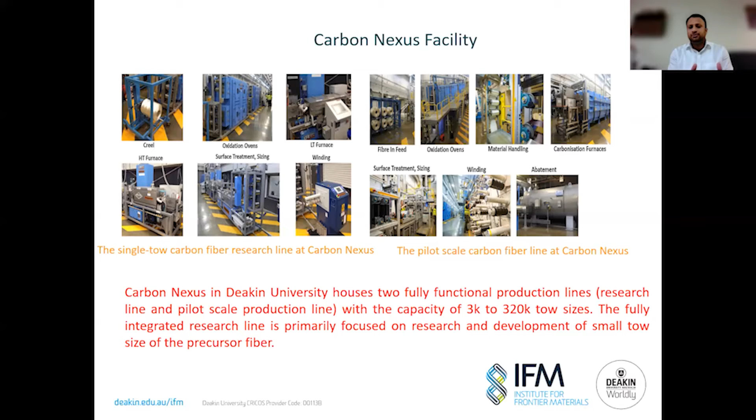And then if we really want to process less than 3K, we also have a facility called carbon fiber simulator. We normally use this carbon fiber simulator for feasibility studies. Let's say we are developing some new precursor; for running the research line and the pilot line, we require a lot of precursor fiber. But for just simulating the stabilization and carbonization parameters, we use the carbon fiber simulator, where we can use any tow size, from 300 filaments to 3,000 filaments. So these are some facilities in Carbon Nexus.

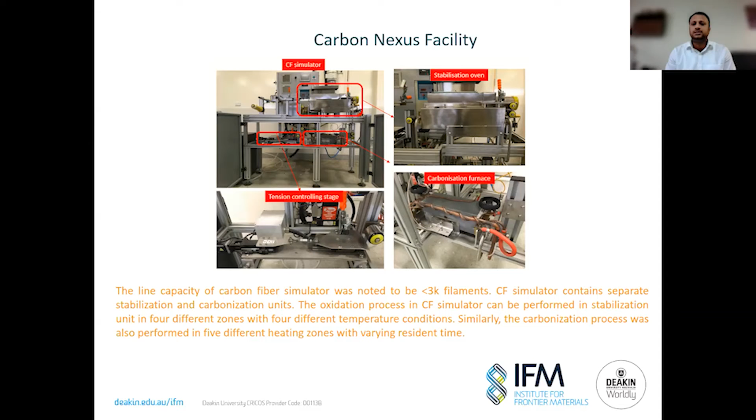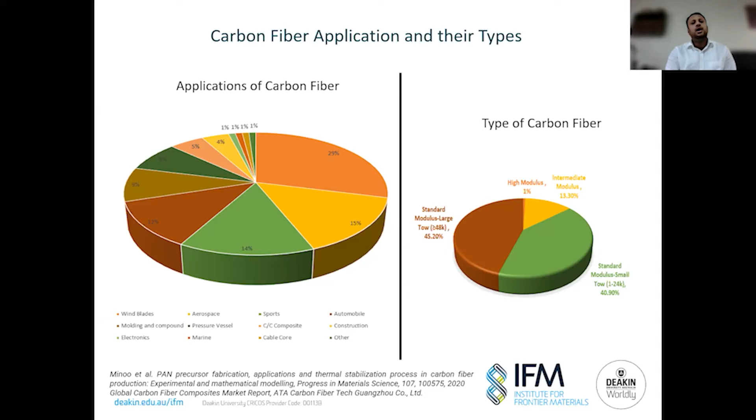There are different types of carbon fiber available: high strength fiber, high modulus fiber, and intermediate. I will not go into much detail on the basis of these definitions, but generally they are defined in four to five different forms. And if you look into carbon fiber manufacturing, three major precursor materials are available: polyacrylonitrile, pitch, and rayon. The entire process consists of first producing the precursor, then stabilizing it, carbonizing it, and finally comes the carbon fiber.

The overall carbon fiber market is fundamentally dominated by polyacrylonitrile. 90 to 95% of the carbon fiber market is covered by polyacrylonitrile. Pitch comes second. Rayon is almost not used at all nowadays because the final carbon content is very low. So if you talk about the challenges, why we really need to replace PAN or reduce the cost of carbon fiber manufacturing, the major challenge comes from the PAN precursor material cost.

For the overall cost distribution, we had one small project with Ford US where we did an in-depth cost analysis of the production. We developed our own model considering each and every aspect. Since we have the pilot line, we also validated this model. Based on our model, we identified that around 50 to 53% of cost comes from the PAN.

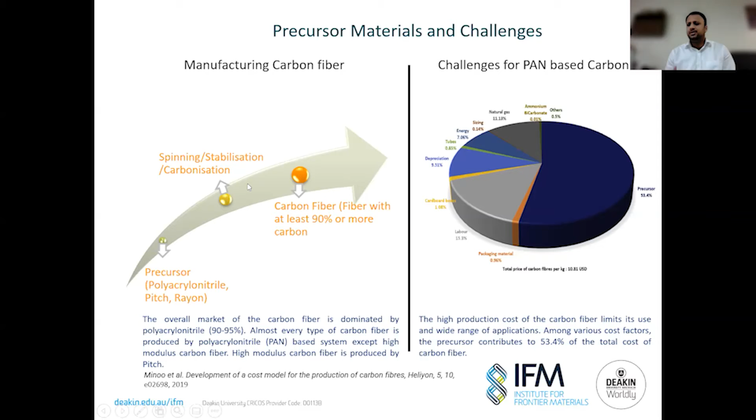Among a lot of options, lignin was considered one of the prominent materials from which we can develop a precursor. I will not go into what lignin is and how it is produced, but generally lignin is the second most abundant material after cellulose, and it exists with cellulose and hemicellulose, providing structural stability to the plant cell. This project was funded by Ford US for their automotive application. This year we finished this project, and we did this on a research line.

The catch in this project was, if you see any lignin papers or projects, they normally do it on a lab scale. We have done it on a pilot scale. We produced around 500 meters to 1 kilometer of continuous fiber out of lignin. And we have done the cost analysis also. We have shown that by using lignin, we can reduce the cost by 25%. We are further moving ahead, and we are pretty sure that we can further reduce the cost.

This project has finished this year. We are continuing for the next year, so we are looking for some better and more satisfying solution coming out of this project.

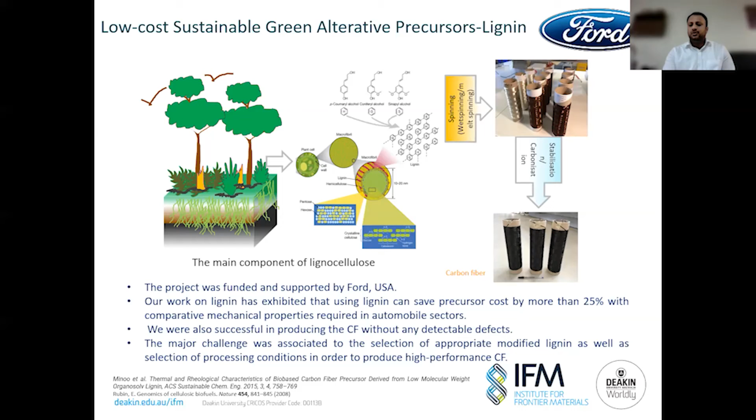And then we were looking for a second alternative for carbon fiber development, which is called asphaltene. Actually, this project was funded by Alberta Innovates. They are a petroleum-based company in Canada. We finished phase 1 last year, and this year we were granted the second phase, where phase 1 was the feasibility study. Basically, in phase 2 we are working on large quantity carbon fiber development from the asphaltene.

So what is asphaltene? Basically, in Canada, mostly oil comes in the form of a sand, which is a combination of bitumen, water and clay. Asphaltene is a leftover of the bitumen. It is basically a waste. So they are looking for some solution for that waste, and they are piling up millions and millions of tons of waste coming out of bitumen processing.

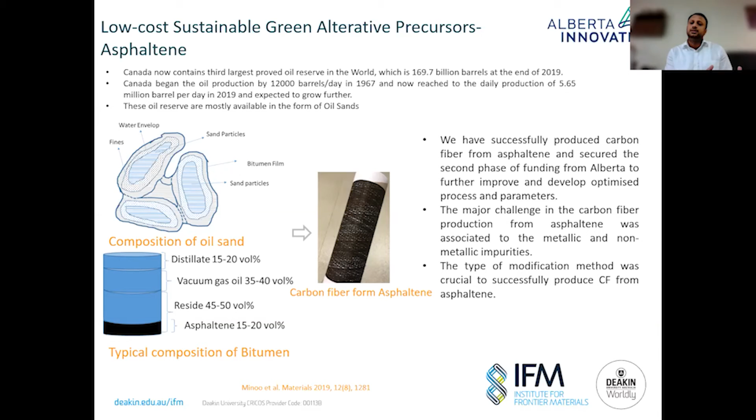So we proposed that we can try carbon fiber manufacturing, because this asphaltene has a very high carbon content. The asphaltene which we have received from Alberta has a carbon percentage of more than 80. So we believe that definitely it is going to be a good source, and you can see that we have produced the carbon fiber from it. In phase 1 it was a very small quantity, but in this current phase we are looking for production of a large quantity. So asphaltene is another sustainable source we have looked into for producing carbon fiber.

And then we have one more project with Carbon Innovation, in collaboration with Monash University. In that project we have used brown coal, lignite basically. In Australia, the main source of electricity comes from brown coal. So if we are promising a net zero future, we need to look for some other option where the waste of those materials can be utilized for some value-added application.

So in this project we were trying to produce carbon fiber. This entire process goes from fiber extrusion, then winding, wet spinning, and then carbon fiber production. We were very successful in producing carbon fiber out of this lignite project. We wanted to further expand this part, but we are still waiting for the next round of funding.

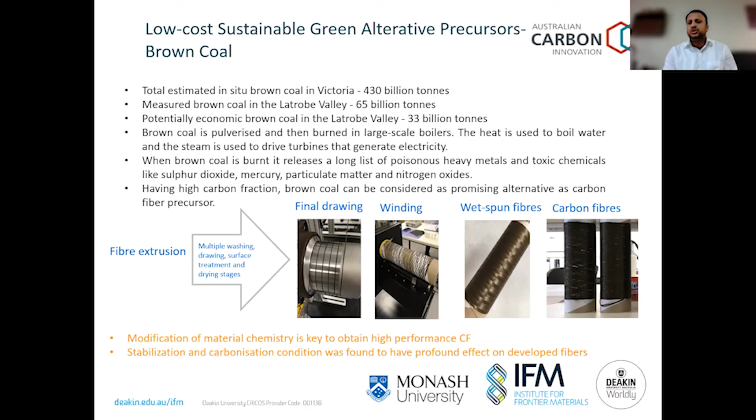So these are the three basic precursor materials which we have used in our projects, and we are looking even further. There are a number of projects we are doing on other alternative materials. So let me summarize the challenges we are facing. The first challenge is that whatever alternative materials we are using, we need to reach the PAN precursor quality, which is one of the biggest challenges.

Second thing, any natural material you take to replace a man-made material comes with some extra functionality. There will be some ashes, some metal traces or some impurities. So all these alternative precursors need some purification and modification methods. Before being used for developing a precursor, it has to be modified or purified in some form, either chemically, mechanically or thermally.

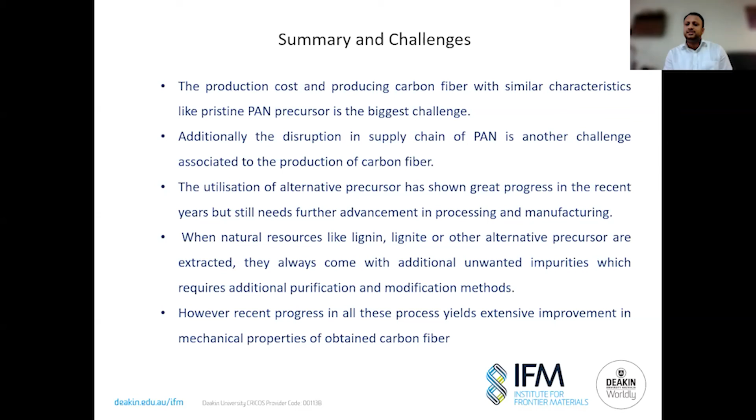So this is one of the challenges, but over the last decade a lot of advancement has happened in the processing. A lot of companies are now providing fiber-quality lignin nowadays. So things are progressing, and we are very hopeful that in the coming time we will be able to get something which will definitely challenge PAN-based carbon fiber. This is our hope, and this is what we are expecting.

In the acknowledgement, I would like to acknowledge Deakin and ANFF. They have supported us with instrumentation in our IFM labs.